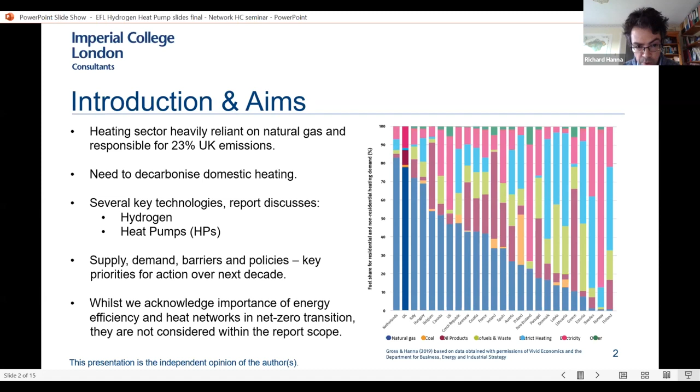We recognise that heat networks will also have a very important role to play in contributing to a net zero transition for heating, and even more so, above all of these low carbon heat interventions, energy efficiency is the first and most important intervention that can be made. But we don't consider energy efficiency and heat networks in the scope of this report in a detailed way, only in passing.

So we identified some general barriers to implementation in the report. First of all, building energy efficiency: as you're probably well aware, the UK's housing stock is one of the oldest and least thermally efficient in Europe, and therefore a comprehensive programme of improvements and retrofitting buildings is urgently needed and would be beneficial regardless of low carbon heating technologies installed. This would help to reduce heating demand and optimise the performance of heat pumps or hydrogen boilers.

Now, another key priority area is industry skills and training. The number of trained installers with the skills needed to install heat pumps needs to be scaled up substantially to support a low carbon heat transition. There are significant shortages of skilled workers in heat pump installation and maintenance. And also gas boiler installers do not currently have the necessary skills to install hydrogen boilers.

And then there's also an issue of public awareness, in that, at least to date, low carbon heating is still largely unfamiliar or poorly understood. And there are at least a couple of recent surveys that suggest there's low public awareness that gas boilers contribute to climate change. There has actually been an explosion of media coverage in recent weeks on low carbon heat, but the effect of that is yet to be evaluated in reliable surveys.

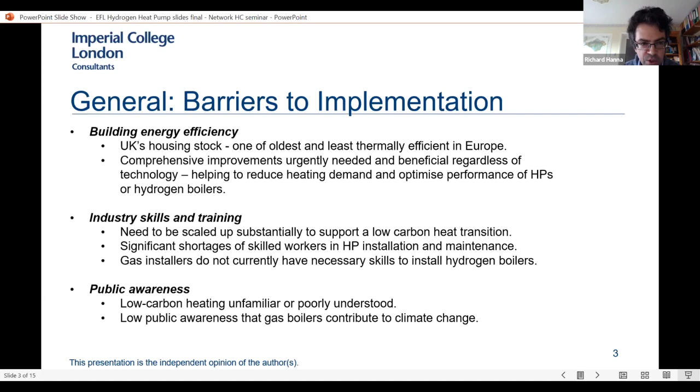I'll now cover in turn hydrogen and heat pumps. In the report, we structured this by first looking at supply aspects, then demand, looking at barriers to uptake and policies. Generally the way we approached this was to do a narrative review of selected literature, but also drawing on previous systematic reviews that I've carried out with others on international experience of implementation of low carbon heating technologies.

So on hydrogen, no carbon dioxide is produced when hydrogen is combusted. However, a key problem with hydrogen at the moment is that 97% of hydrogen production globally is currently reliant on fossil fuels. In terms of colour of hydrogen, this could be from coal, referred to as black or brown hydrogen, or from natural gas, known as grey hydrogen. So low carbon hydrogen production would need to be from fossil fuels combined with carbon capture and storage, which is referred to as blue hydrogen, or from renewable electricity, known as green hydrogen. In the slides to come, I'll discuss some of the issues with those forms.

One potential advantage of hydrogen is that the consumer experience of hydrogen boilers in domestic settings is likely to be similar to the experience of gas boilers once installed, but there are a number of other very important challenges involved in actually getting to that point. UK hydrogen production capacity is currently 3 to 5 gigawatts, but this, of course, is mainly not low carbon hydrogen. The UK's industrial decarbonisation strategy includes plans to use low carbon hydrogen in industrial clusters.

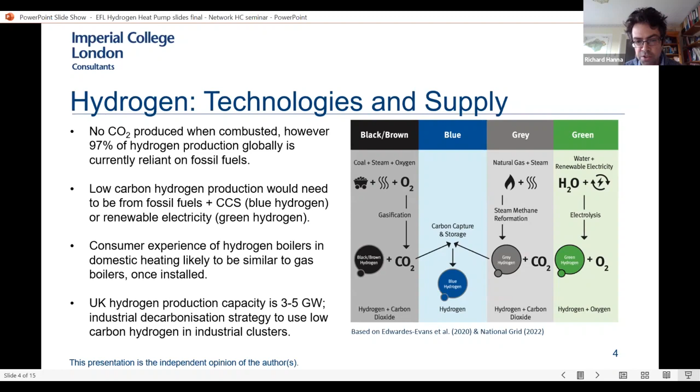So one key idea with hydrogen is that the UK's extensive gas grid could be repurposed for transporting hydrogen. And as luck would have it, the Iron Mains Replacement Programme, initiated in 2002 for reasons of public safety, involves the replacement of iron pipelines with polyethylene plastic pipes, which are more suitable for hydrogen distribution.

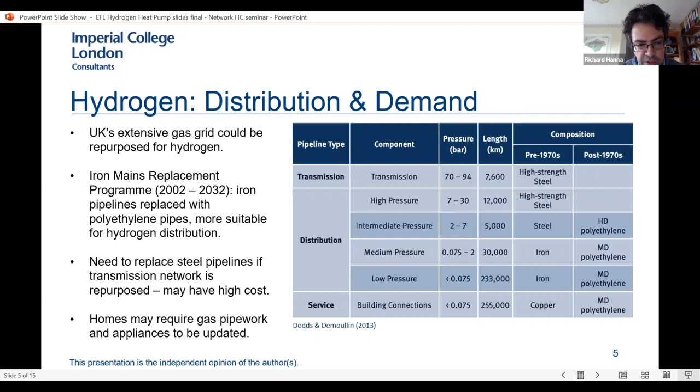However, in terms of transmission, there would also need to be a replacement of steel pipelines in the transmission network. These would need to be repurposed at least, and this would come with a high cost. Although the consumer experience of hydrogen boilers could be similar to gas boilers once installed, homes would require individual home surveys and may often require replacement of existing gas pipework, and would require the installation of hydrogen compatible appliances or modification of existing appliances to be suitable for use with hydrogen.

In terms of the barriers to implementation of hydrogen, as I mentioned, there's very limited low carbon hydrogen production sources in the UK. This refers to very limited production of green hydrogen, but we're talking very small amounts. And green hydrogen production is not yet cost competitive, more expensive to produce than blue hydrogen, and much greater capacity of renewables would be needed to produce it.

And with respect to blue hydrogen, there's no operating carbon capture and storage in the UK at a commercial scale. So this is a key problem that would need to be overcome. Otherwise, clearly blue hydrogen cannot be low carbon. And CCS infrastructure globally has not been deployed on anticipated scales. So again, this would be something that would need to be scaled up extensively and rapidly, and is a key barrier to blue hydrogen being realised.

Large volumes of hydrogen would also need to be stored to meet peak heating demands. And a lot of research still needs to be done into hydrogen storage. There has been some research on hydrogen storage in salt caverns. There are various safety risks associated with that which would need to be managed. And of course, there are safety concerns with the safe use of hydrogen within residences, and ensuring safe use is essential. And so this is a priority for forthcoming hydrogen trials.

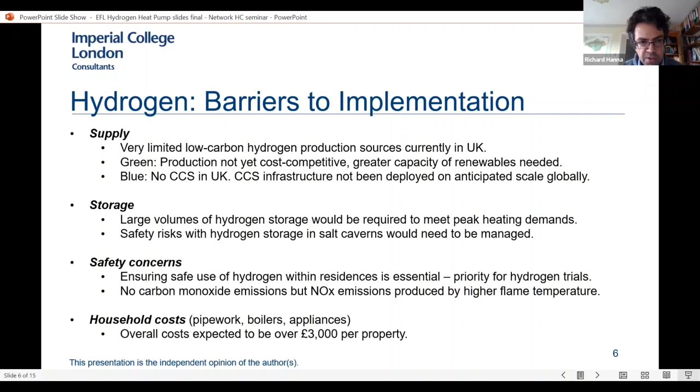Policy support and regulation. So I mentioned hydrogen trials. The government plans to support a programme of trials, so full hydrogen heating trials in local neighbourhoods by next year, in larger villages by 2025, and building up to a pilot hydrogen town by the end of the decade. But in actual fact, the government has committed to making a strategic decision on the future use of hydrogen in heating in homes in 2026, based on the evidence gathered so far, for example, through trials and research and demonstration. And there is a £240 million net zero hydrogen fund. This would support low carbon hydrogen deployments, but it's unclear how much will be used for domestic heating.

The government also consulted on business models last year to incentivise the production and use of low carbon hydrogen, with the aim of reducing the cost gap between low carbon hydrogen and fossil fuel hydrogen produced without CCS. Also, there's a recent government consultation on developing low carbon hydrogen standards, which would help to develop the market and create demand by distinguishing hydrogen by origin and making it clear which sources are actually and genuinely low carbon. That's hydrogen.

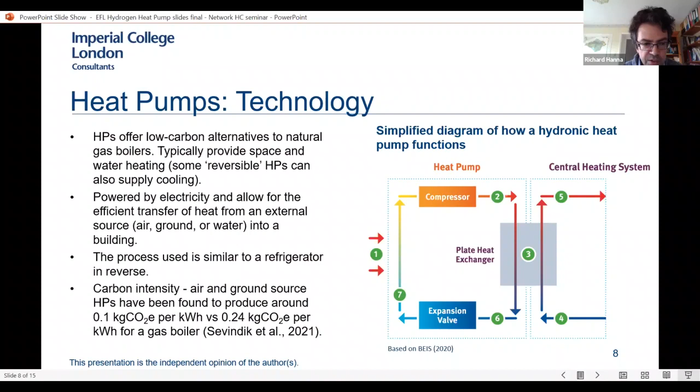And in terms of carbon intensity, air and ground source heat pumps have been found to produce around 0.1 kilograms of carbon dioxide equivalent per kilowatt hour, and this is half the equivalent carbon intensity of gas boilers. So that's one particular study.

Now, a key issue is the supply chain for heat pumps. As mentioned, most homes in the UK are connected to the gas grid, but in 2020, the total stock of heat pumps in the UK was just over 250,000 compared to 29 million households in the UK. So to meet net zero in the UK, heat pumps, at least according to the Committee on Climate Change, would be needed in around 18 million homes. Our installed stock compares to installed stocks of several million in countries such as France or Sweden, well, 2 to 3 million.

So in the UK, there's around 1,000 installation companies, depending on what you read. And there's only several domestic manufacturers. So there's definitely a need to both vastly upscale qualified installers and companies, and also to develop more local manufacturing. Whereas boilers in the UK, for example, 55% of demand is met by domestic manufacturers.

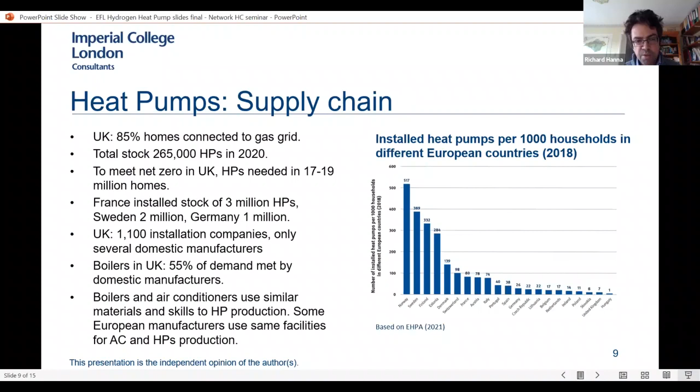So there is some potential for transferability from boilers and air conditioners, which use some similar components and may require some similar skills to their production that would be used in the manufacturing of heat pumps. And in the UK, we could learn from other European countries where manufacturers use the same facilities for the production of air conditioners and heat pumps.

Moving on to barriers to implementation for heat pumps. A well-charted barrier is installation and upfront purchase costs. So typical cost of installing the most common kind of heat pump in the UK, air to water, is at least around £9,000 and four times the cost of replacing a gas boiler. This is a key problem, and there's no really compelling evidence about how the cost can be reduced substantially. And indeed, I've got a colleague working on this at the moment.

So whilst it's likely that some cost reductions could be achieved through economies of scale or making installation processes more efficient, it's likely that we're going to need also more flexible financial incentives and green financing mechanisms.

Financial incentives for heat pumps have been available in the UK over the last 15 years, but these have been very stop-start and inconsistent in terms of what's being incentivised, whether it's upfront or running costs. And even the latest boiler upgrade grant proposed by the government to run from this year for 3 years would only support around 90,000 heat pumps in terms of the level of funding committed.

Another key barrier to uptake is that the UK electricity price still incorporates policy costs of renewables investment compared to natural gas, which doesn't incorporate so much of the cost of decarbonisation. So this is a sort of perverse incentive that really ought to be corrected to maximise the potential to reduce running costs from heat pumps. And the UK could certainly learn from what other countries have done in this regard.

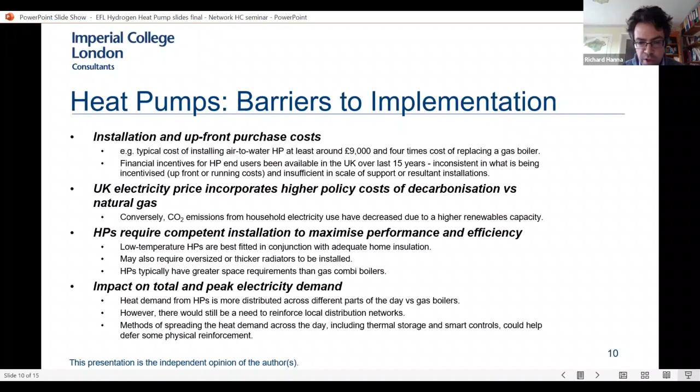Another concern, impacts on total and peak electricity demand. So heat demand from heat pumps is likely to contribute to increasing total electricity demand overall, even if the impact on demand is more distributed across the day. And so therefore there's likely to be either a need to reinforce local distribution networks or need for thermal storage or smart heating flexibility.

So I think I'm probably running out of time, but just coming to the last few slides here. There have been several studies comparing the costs of future scenarios of moving to low carbon heat using heat pumps and hydrogen. So there was a study carried out for the Committee on Climate Change in 2018 that indicated that the overall system costs of moving to hydrogen or electrification through heat pumps were relatively similar, but somewhat cheaper for electrified heating pathways. And there's an International Council on Clean Transportation study shown in the charts that projected the annual household cost of low carbon heating options in 2050 and found that these would be lowest for heat pumps.

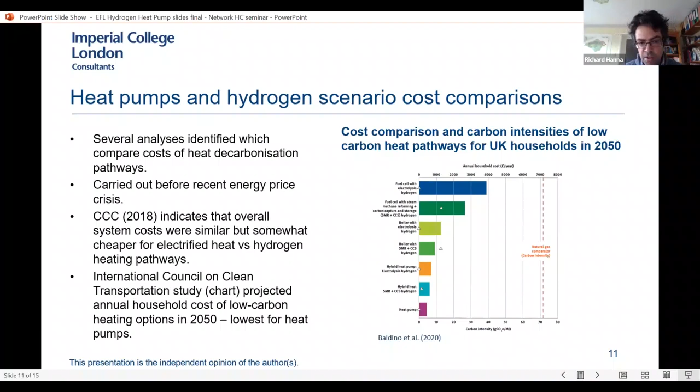And just an addendum here that there was some recent potentially erroneous coverage in the Daily Mail and Telegraph about the running costs of heat pumps being very, very high, but there has been a recent study by the Regulatory Assistance Project, which has found that the running costs for heat pumps would be lower than gas boilers after the price cap goes up in April, based on a COP of 3 for air source heat pumps, if I recollect correctly.

In terms of policy support, I mentioned that the UK should follow examples from Germany and France by looking to include either a carbon price in the cost of gas bills or transferring policy costs from electricity bills to general taxation. Now, this is not something we've looked into in detail, but certainly I think there needs to be a discussion about which of these types of mechanisms would be fairest and how they could work.

The government should also be supporting schemes and products which provide access to affordable capital towards installation costs of heat pumps, such as mortgage additions, tax credits and low interest loans. And some of these mechanisms have already been implemented in countries such as France, Germany and Italy, which in recent years have had quite high rates of heat pump installation across Europe.

In Sweden and Switzerland, we could also learn from examples of long-term policy support for heat pump rollout, in particular support for long-term test centres, which have helped to raise technical standards over time and provide quality assurance. In the UK, the last national field trial was concluded in 2013, and heat pump industry representation is somewhat fragmented. So I think that there needs to be more coordination to ensure that technological innovation can both improve products and help to reduce their costs.